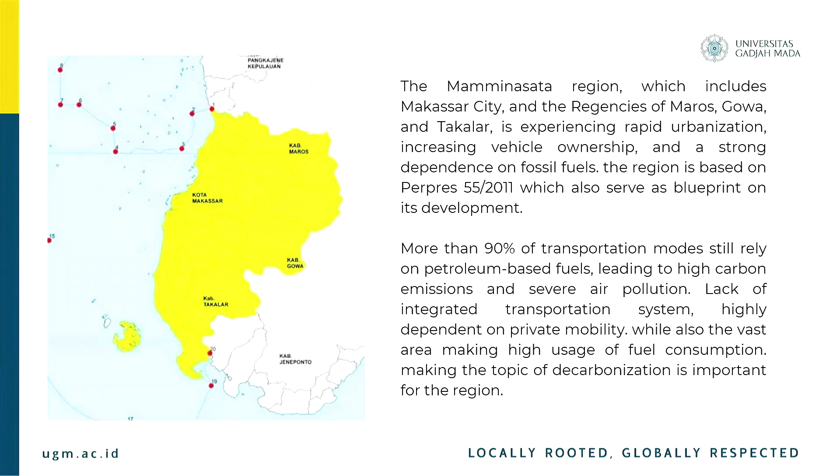We know the updated data from IESR. The transportation sector in Indonesia is one of the major contributors to carbon emission, accounting for more than 27% of total national emission. In the Mamminasata region, which includes Makassar City and the regencies of Maros, Gowa, and Takalar, the area is experiencing rapid urbanization, increasing vehicle ownership, and a strong dependence on fossil fuels.

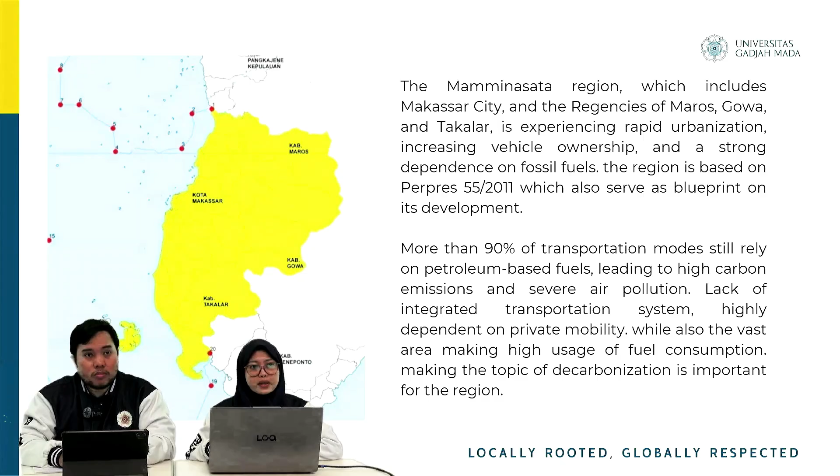The region's development is based on Perpres number 55 of 2011, which also serves as a blueprint for its development. More than 90% of transportation modes still rely on petroleum-based fuel, leading to high carbon emission and severe air pollution. Lack of an integrated transportation system, high dependence on private mobility, and the vast area of the region result in high fuel consumption, making the topic of decarbonization important for the region.

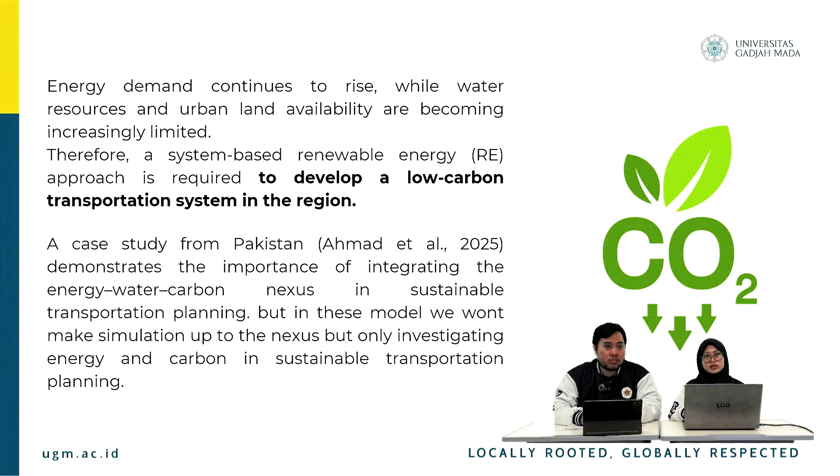Energy demand continues to rise, while water resources and urban land availability are becoming increasingly limited. Therefore, a system-based renewable energy approach is required to develop a low-carbon transportation system in the region. A case study from Pakistan by Ahmad in 2025 demonstrates the importance of integrating the energy–water–carbon nexus in sustainable transportation planning. But in this model, we won't simulate up to the nexus level, only investigating carbon in sustainable transportation planning.

For the next part, I will explain our reference. The main review in this project is a journal based on Pakistan by Riza Ahmad and team. The study analyzed Pakistan's transport sector.

They used LEAP, a software for simulation, to simulate four scenarios, including business as usual. Transport energy consumption surges from 24 to 146 metric ton of energy, and emission also rises from 106 to 481 metric ton carbon equivalent. The journal shows pathways to significant reduction potential in Pakistan, which became our basis and inspiration to take this case.

Impressively, the paper shows us the result that the mass transportation scenario actually reduces emission better than the EV solution or hydrogen and hybrid solution, which we are going to examine in our presentation - is there any shift from that result? Because it was the same case, but a different location for the study.

Our research objective is to design and simulate a low carbon transportation development scenario in the Maminasata region by adapting from the same journal that we stated before.

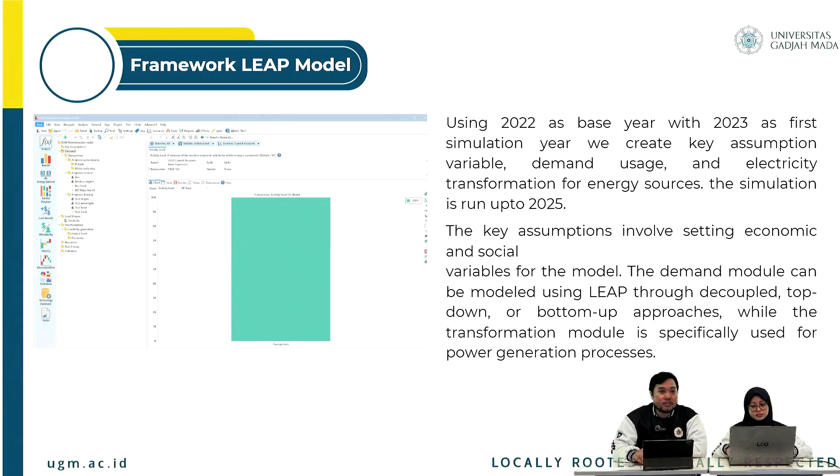In our case, we are using a bottom up approach. The transformation model is specifically used for the power generation process. Okay, next, this is the structure for our model.

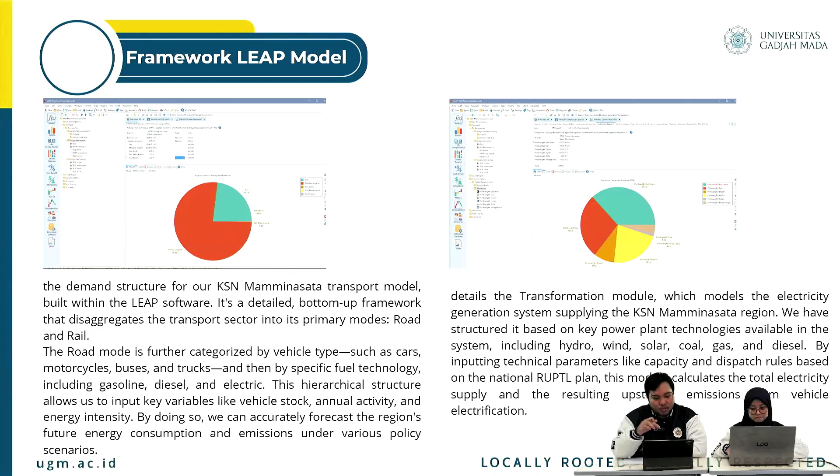So the demand structure for our KSN Mamminasata transport model is built with LEAP software. It's a detailed bottom-up framework that disaggregates the transport sector into primary modes: road, street, and rail use. The road mode is further categorized, mostly into private mobility, also differentiated between car and motorcycle, which we also differentiate but it isn't really shown in the graphic, but there's also a mass transportation sector or current mass transportation sector.

For the transformation model, which generates electricity for supplying the KSN Mamminasata region, the structure is based on key power plant technology, including hydro, wind, solar, coal, gas, and diesel. It uses a dispatch rule based on RUPTL. This model calculates the total electricity supply and the resulting upstream emission for vehicle electrification.

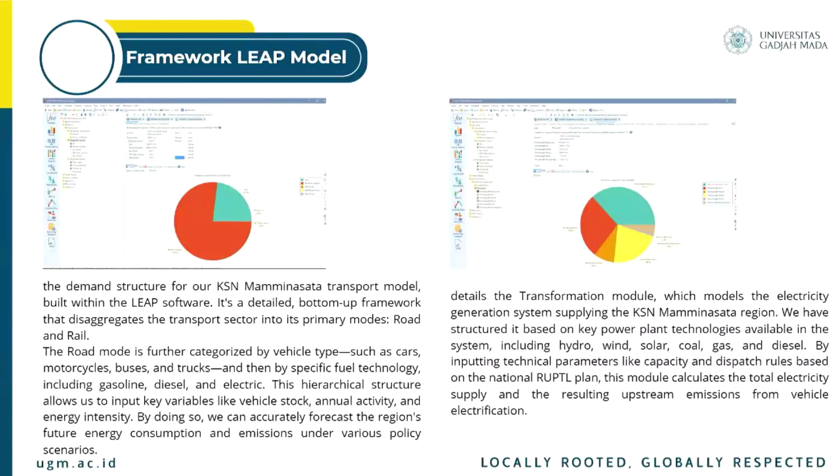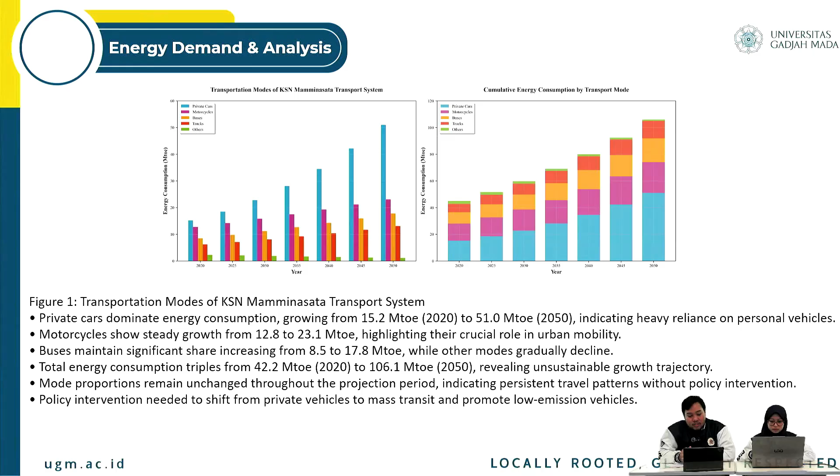The buses maintain significant increase, quite good in business as usual, from 8.5 to 17.8, and total energy consumption actually tripled from 42.2 metric tons of energy to 106.1 metric tons in 2050, revealing that it was actually an unsustainable growth trajectory because we are consuming more and more energy.

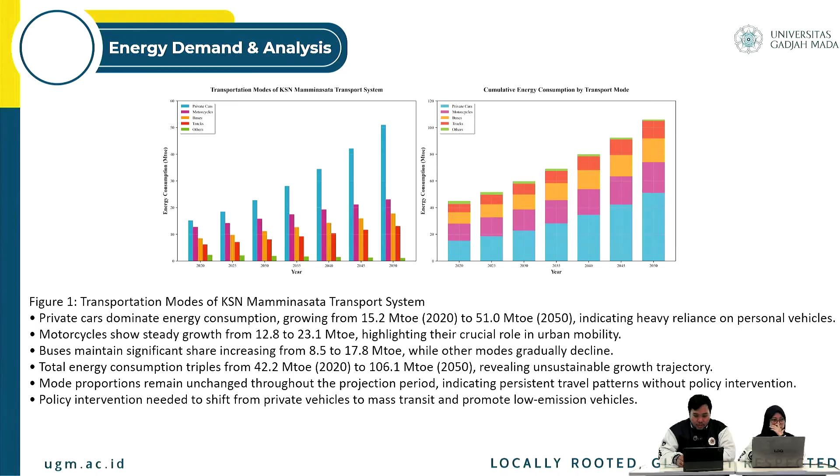So intervention is needed to shift from private vehicles to mass transit. I think from this chart we can agree with that, and to promote low emission vehicles next. So this is the data from our simulation. Okay, next.

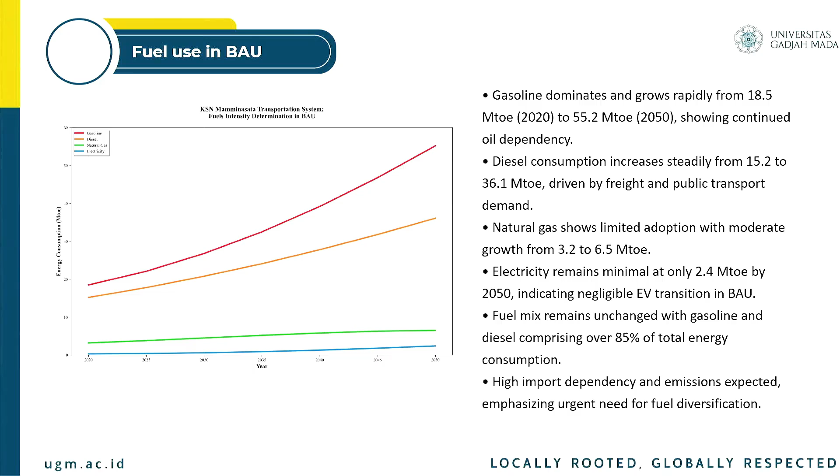Okay, this is the fuel use scenario, BAU, for the KSN Mamminasata transportation system. Fuel intensity determination in BAU: we can see gasoline dominated and grew rapidly from 18.5 to 55.2, showing continued oil dependency, and then diesel consumption increases steadily.

And natural gas saw limited adoption with moderate growth from 3.2 to 6.5 million tons, and then electricity remains minimal at only 2.4 million tons by 2050. This indicates negligible electric vehicle transition in BAU. And then the fuel mix remains unchanged, with gasoline and diesel comprising over 85% of the energy consumption.

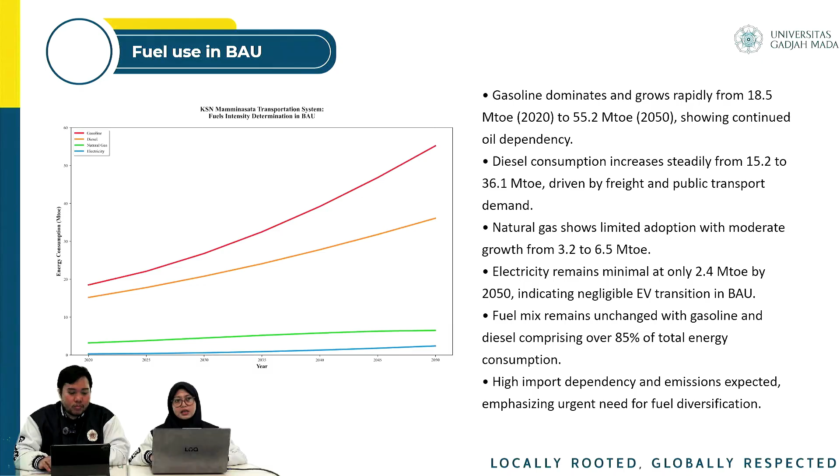And lastly, high imported dependency and emission are expected, highlighting an urgent need for fuel diversification. Okay, this is the chart of energy transition determination

along EVS, HVS, and MTS for the KSN Mamminasata transportation system. For the EVS scenario, electricity dominates the fuel mix, growing from 0.8 million to 54.2 million tons. And then for the HVS scenario, this

diversification occurs with electricity reaching 25.1 million tons and hydrogen growing to 15.2 million tons by 2050, maintaining moderate gasoline and diesel use during the transition period.

For the MTS scenario, the most efficient energy distribution, with electricity at 16.8 million tons and hydrogen at 10.5 million tons in 2050. This is combined with low fossil fuel consumption among all scenarios.

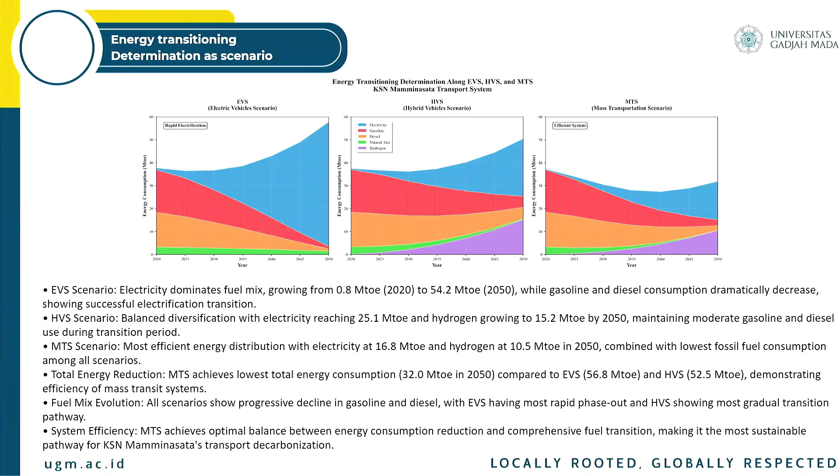Fuel mix evolution also shows a progressive decline in gasoline and diesel, with EVS having the most rapid phase-out and HVS showing the most gradual transition pathway. In terms of system efficiency, MTS achieves an optimal balance between energy consumption reduction and comprehensive fuel transition, making it the most sustainable pathway for KSN Mamminasata transportation decarbonization.

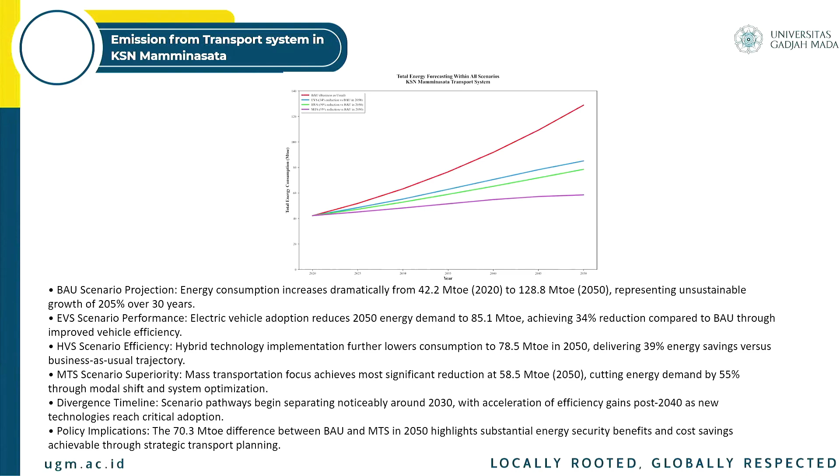Okay, so in terms of emissions, in our graphic we can see that under business as usual, if we continue to do what we do today, the KSN will have to produce more emissions while fuel consumption doubles. In terms of the current trend where our government is pushing the EV scenario in transportation solutions, it can actually help reduce energy demand to 85.1 metric tons of energy, achieving a 34% reduction compared to BAU.

But if we compare that scenario with the hybrid scenario, where we combine hybrid technology—not only diesel with battery, but also hydrogen—it can deliver 39% energy savings, more than the EV scenario.

And also, if we look into the graphic again, the bottom line—the violet colored line, which is the mass transportation system—was superior to other solutions, where mass transportation focuses on achieving the most significant reduction, about 58.5 MTOE by 2050, and cutting energy demand by 55%.

So while EV is green and EV was good, it was not actually the best solution. The best solution in our model is actually using the MTS, or mass transportation system, scenario.

So there's this divergence timeline—the scenario pathways begin in 2030, where we can see an acceleration of efficiency gains post-2040 as new technology reaches critical adoption. As for policy implications, the 70.3 metric ton energy difference between BAU and mass transportation in 2050 highlights substantial energy security benefits and cost savings achievable through strategic transport planning.

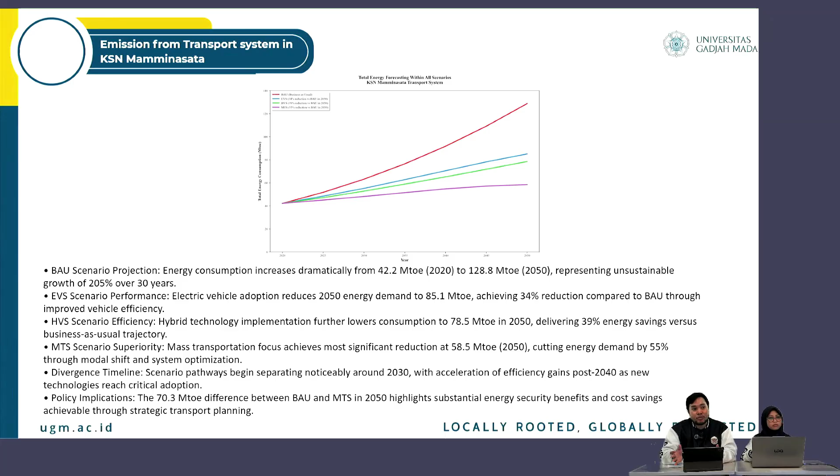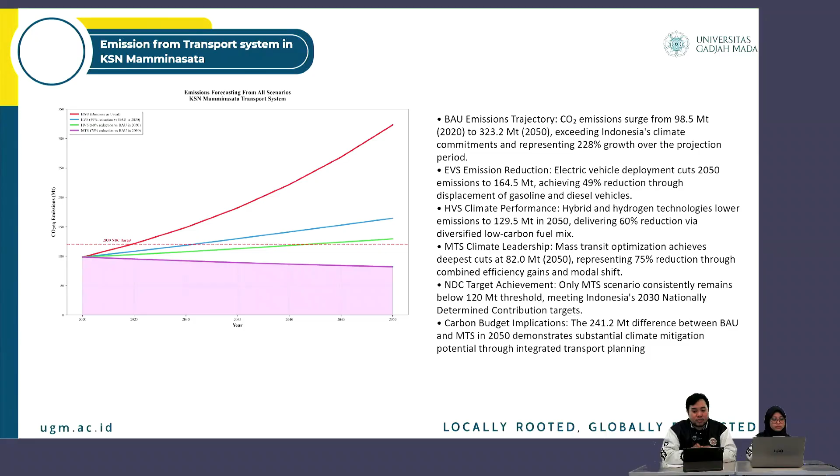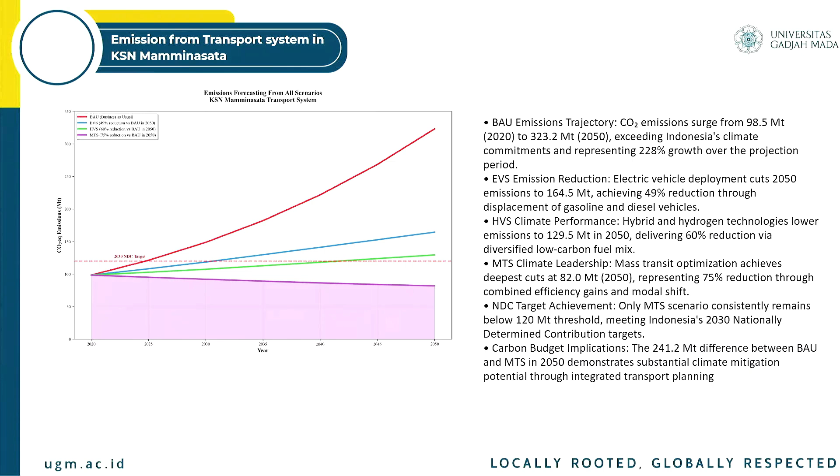We will continue for the emission. We can see that the trajectory of CO2 emissions surged from 98.5 metric tons carbon equivalent to 323.2 MT, exceeding Indonesia's commitment, representing 228% growth over the projection period.

So actually, Indonesia under current conditions wasn't really going to achieve their target by 2050. But I think the previous group already highlighted that in their presentation, and that the main solution, even though it's the best solution right now and the one being pushed by the government, the hybrid solution actually performs better than the full EV solution.

While in terms of climate leadership, mass transportation actually champions the optimized scenario that achieves the deepest cut, at 82 metric tons of carbon equivalent.

So in our graphic, the line of the NDC target, among all four scenarios in our model, the only one that achieved the target by 2050 is mass transportation, while hybrid and EV perform well at the start but after 2030, as we said before, we can see accelerating technology and fuel usage. Mass transportation is the only one that consistently remains below the 120 metric ton carbon equivalent threshold.

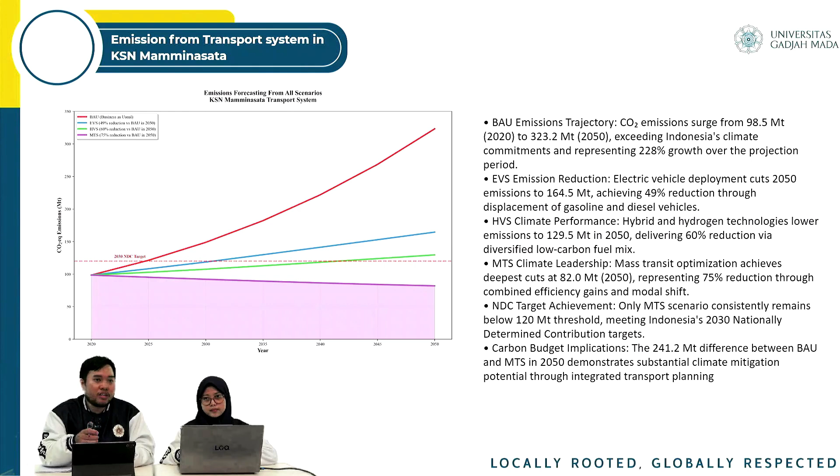...the solution for urban development, for making areas like KSN Mamminasata, which is a metropolitan region being developed for economic growth and for people to live in, should have good integrated planning—not just pushing people to buy EVs, not just making the streets more packed with cars, but providing an integrated mass transportation system that could serve the public and also help cut fuel consumption and reduce emissions.

Okay, the last conclusion for our presentation: the analysis revealed that the transportation sector in KSN Mamminasata remains heavily dependent on fossil fuel, with a sharp increase in both energy consumption and carbon dioxide emissions under the BAU scenario. Without intervention, energy demand could more than double, and emissions could rise by over 228% by 2050.

Three decarbonization scenarios present distinct outcomes in efficiency and emission reduction. The EV scenario achieves a 49% reduction in emissions through grid electrification, the hybrid scenario offers 60% improvement by integrating electric and hydrogen technology, and the MTS scenario delivers the most effective outcome, reducing energy demand by 35% and emissions by 75%.